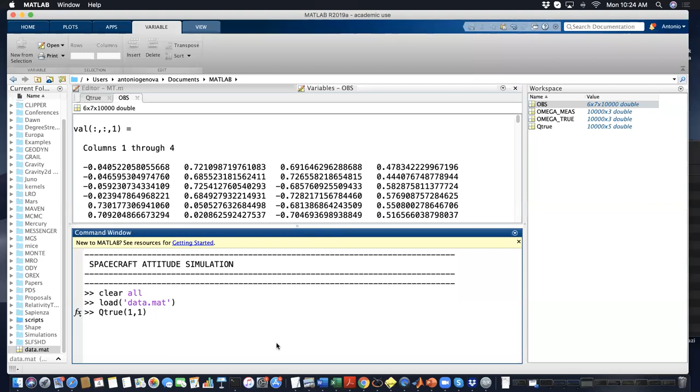So the first quaternion will be indeed the first row and the first 4 columns. So this is the first quaternion indeed, because if you look at column number 5, this is time equal to 0. So the first quaternion at time 0 is the first 4 columns of Q true. You only need this information if you want to compare your estimated quaternion with the known one. Since you have the simulation here, you know the true quaternion, okay?

Well, the OBS matrix, as I said, is simulated by assuming that you have 3 star trackers. And each star tracker at that time gives you 2 measurements of 2 independent stars. So we are already assuming that each star tracker has acquired and identified 2 stars. That means that for each time you have 2 stars per star tracker. So 2 by 3, you have 6 observations.

The epoch of the observations is given by the third dimension of the matrix. So the third dimension here is the time. For time equal to 0, you have to take the first submatrix. The matrix is composed, as I said, of 6 by 7. So what you can see here is that for OBS, at the first epoch, you have a matrix 6 by 7. The 6 rows correspond to 6 different observations of the star trackers.

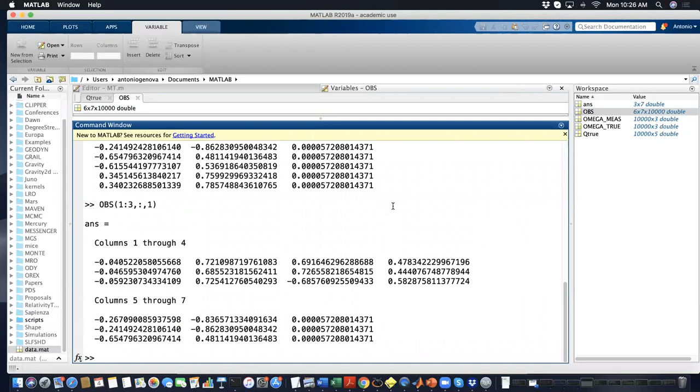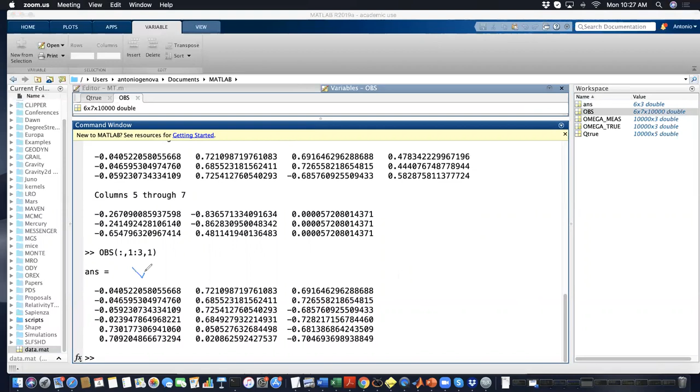The 7 columns are: the first 3 are the vector W, so your measurement. From the first to the third column, you have the vector W. So what I mean here is that you have WX, WY, and WZ. And that will be the first observation, the second one, the third, the 4th, 5th, and 6th. Okay?

Same story if you want to have V. V, the knowledge of the star position in the star catalog, is from column 4 to 6. So in this case, you are not going to have W here, but V, okay? The 7th column is the sigma.

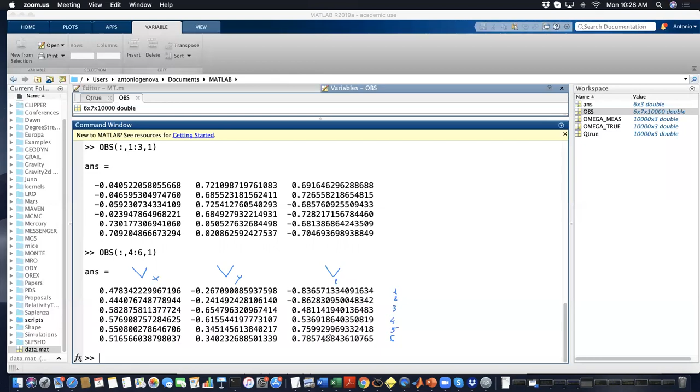To simplify the problem a little bit, I didn't give you a sigma given by the error in the acquisition of your measurement, so a sigma W and a sigma V, but the last column of this matrix represents the sigma. Since I assumed that you have star trackers with the same resolution for a simplified test, I gave you the same sigma.

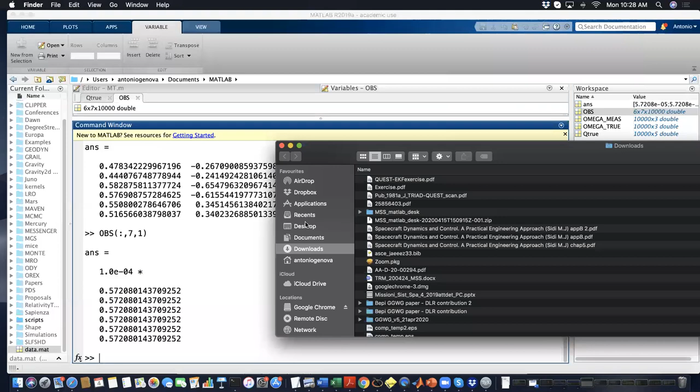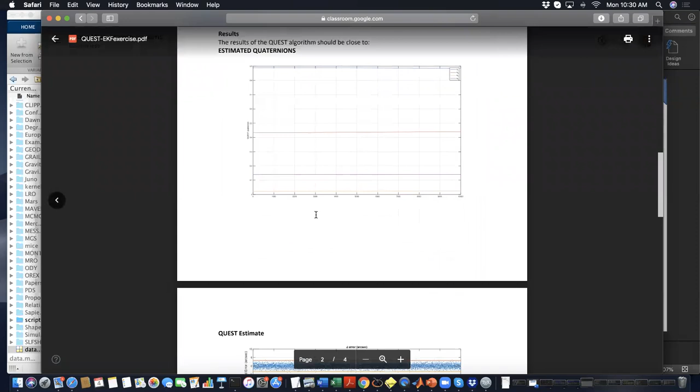But since it is an exercise in preparation for the homework, I'm not giving you exactly the exercise that you're going to have to do as homework. This is only to give you all the information that you need to have a solution of the QUEST algorithm, and you can compare it with the one that I showed you in the other classroom file. The structure of the matrix should be pretty clear because I wrote it here in detail. The solution that you should have from the QUEST algorithm should be very close to this one.

A few of you started the exercise just after I uploaded the file on the website, and noticed that in the initial quaternion that I provided, this Q true, the first 3 columns are the vector part of the quaternion, and originally I gave you a negative vector part instead of a positive vector part. So after a couple of hours on Friday, I updated this file with these values.

The reason the file has been changed is that the quaternions of the real mission have an additional transformation from a real quaternion to its conjugate. So the files that we have for the real mission, instead of giving you the quaternion directly, give you the conjugate. It means that only the vector part has a sign change.

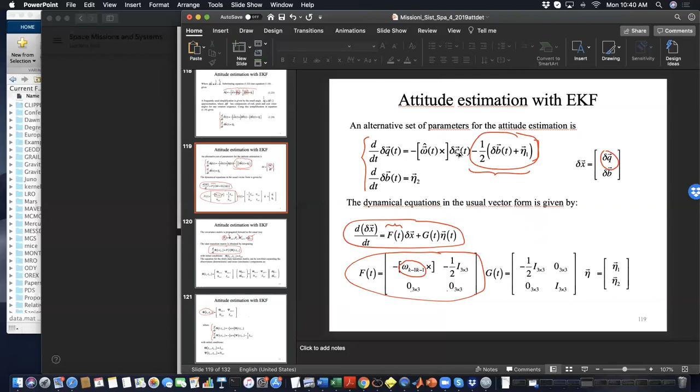The difference between this propagation of the transition matrix with respect to orbit determination is that you are propagating the error by using the property of the quaternion that the delta error of the quaternion is not a difference between the known and the estimated, but here you have the multiplication. So to have an estimation of the delta quaternion, you have to have a cross product of the angular velocity and the delta q. That will be clear later, but I saw that a few of you already started to implement that.

The other main criticality of this problem is the matrices Rk and Qk. That's the reason why the exercise is pretty helpful, because many of you didn't understand completely what I mean by the tuning of the filter. So the exercise will help you understand that. The matrix Rk, for example, can be directly the covariance matrix that you get from the QUEST algorithm. Since the QUEST algorithm only depends on your star tracker measurements, and this is the measurement error covariance, you can assume that your Rk is close to the covariance matrix resulting from the QUEST algorithm.

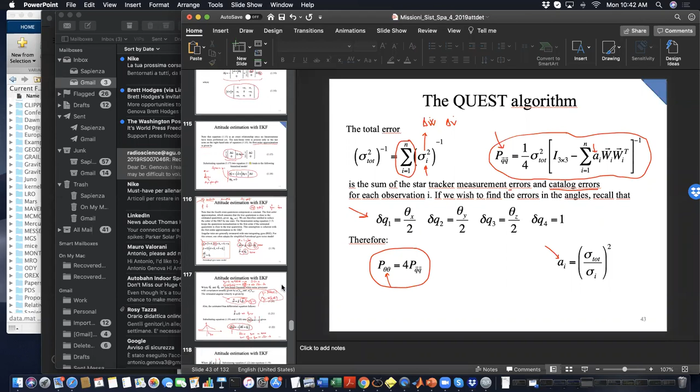So I jump back to the QUEST algorithm solution. What I mean is that the QUEST algorithm gives you this covariance matrix. So you can use this information as your Rk. I will show you that in the script when we show the solution of the exercise. The other main problem is Q, because many of you correctly pointed out: what value of Q is reasonable? This is a fair question.

That could be easily answered for this problem by using the formal uncertainties sigma v and sigma u. If you use these two coefficients, you can, for example, start with a diagonal matrix and try different combinations of sigma u and sigma v. I will show you the combination that I use when I show you the exercise. But you can already start to use sigma v and sigma u to see how that affects your Q matrix. You can also use scale factors to see how the behavior of the Kalman filter changes with your values.

You don't need to propagate the process noise here. Since you have very short time steps, you don't need to do that. It is a simplified exercise, and it is not requested because it is outside the scope of the course. This is only the presentation of the exercise, but I will go into detail next Monday or Tuesday, before giving you the homework. So all your concerns and doubts will be fully addressed. If you still have any problems regarding the text, ask me during the break, or now.

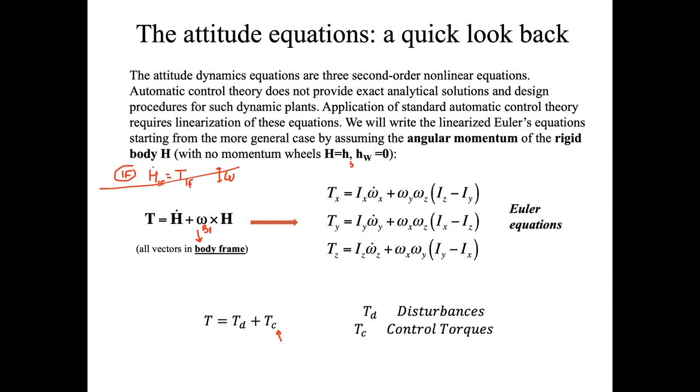Last week we concluded our part on control theory by only looking at the passive stability of the spacecraft. So let me recap briefly what we have seen. We started from the Euler equations in general. We assumed the small angle approximation, so that the body frame is very close to the orbital frame, and we are also assuming a circular orbit.

With these two assumptions, we are able to simplify these equations to three equations in roll, yaw, and pitch. And we have seen that the pitch dynamical equation for attitude control is decoupled from roll and yaw. One of your questions, if I remember correctly, was whether we have considered the gravity gradient. Well, yes, because as I said, we are considering that our body frame has to move concurrently with the orbital frame.

So if we want our body frame to coincide with the orbital reference frame, what we are going to introduce in our equations is the gravity gradient, because the gravity gradient means that you have one axis that is always pointing towards Earth. So the spacecraft, in particular the Z axis, is going to be nadir pointed. So ZB should be close to Z0, the axis of the orbit.

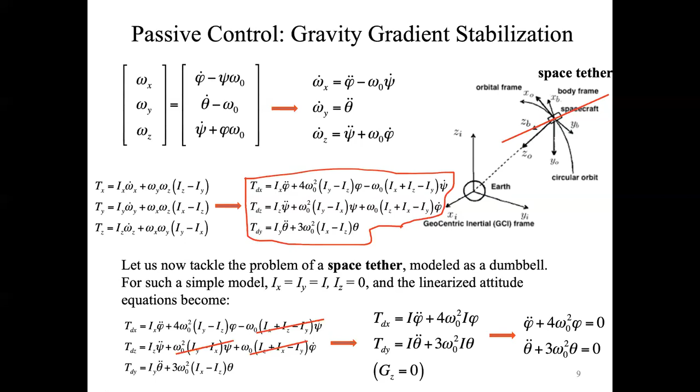So the gravity gradient is accounted for here, and the gravity gradient terms are given by terms that depend on the mean motion of the spacecraft, as you can imagine, because our reference frame is rotating according to the motion of the spacecraft.

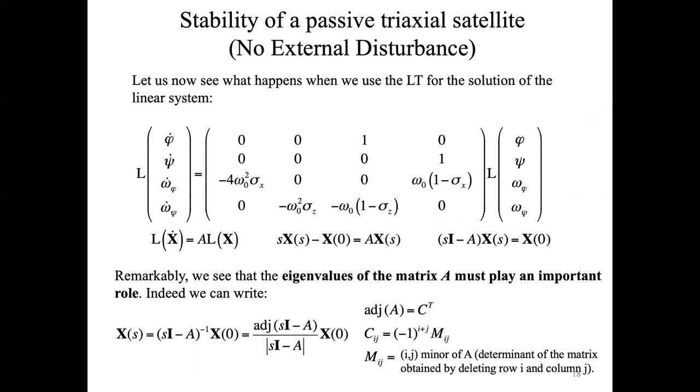So we have investigated the pitch dynamical equation. We have seen that it is stable. It provides stability if we choose the moment of inertia along x greater than the moment of inertia along the yaw axis, so Ix greater than Iz. The main problem is also to investigate the dynamical stability of the roll and yaw axes, because as we have seen, those axes are coupled. So we need to consider this characteristic equation that comes from the matrix we saw last Thursday. Also in this case, as for the pitch angle, our stability depends only on the gravity gradient.

Because one of your questions during the weekend was: we are considering that there is no disturbance, is that the reason why we're able to have stability? Well, the stability of the system is studied independently from the disturbance. We are studying the stability of the associated homogeneous equation. So we have to investigate the stability of the system by assuming that the disturbance is equal to 0.

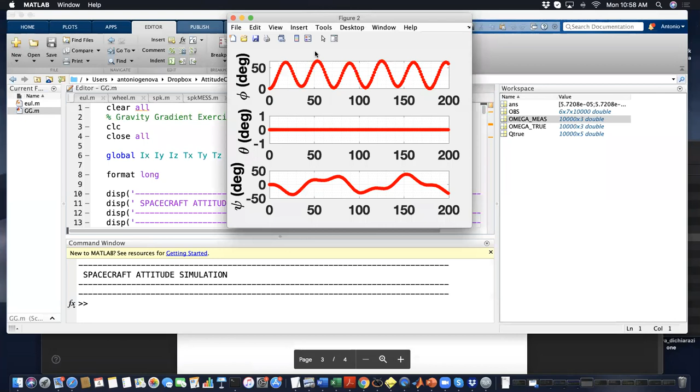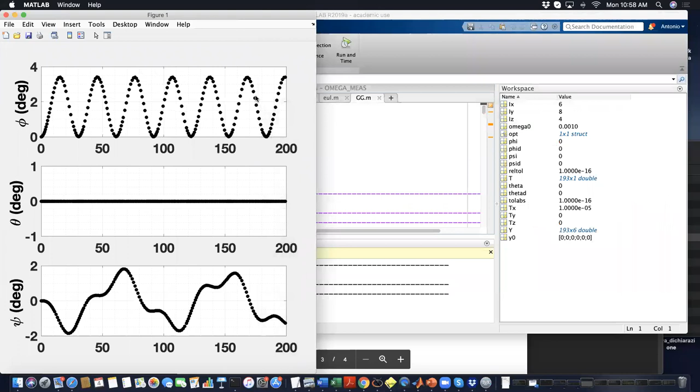So what we can see here is that by augmenting this moment of inertia, we have seen from the MATLAB script that I showed you last time that you will have 2 different conditions. So by starting from a yaw angle equal to 5, what you can see here. So this is not what we... This is the first case. Let me see.

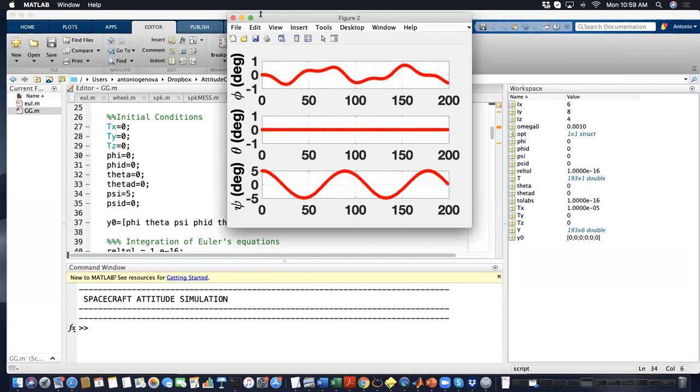So if we start with the angle psi, so the yaw angle equal to 5, what you can see here is that the red curve represents your oscillation of the angle in the roll, pitch, and yaw axis, and you can see that the oscillations along the roll axis are larger if you have a lower moment of inertia. So by including a boom, you are able to increase the moment of inertia and basically to reduce the oscillation along the roll axis.

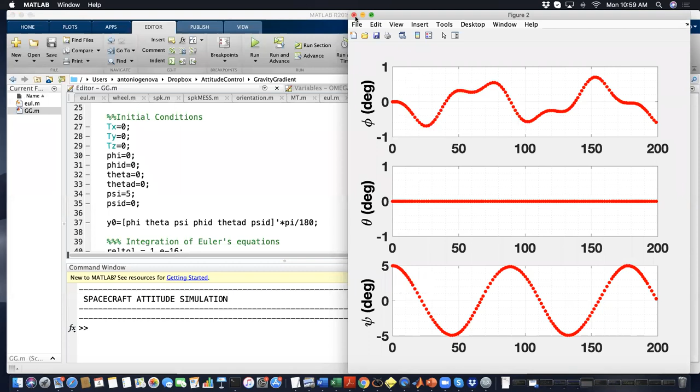What we want to do in the next hour is to use the first actuators of the course, with which we're going to indeed remove or damp the oscillation that we have seen so far. So we know that the gravity gradient cannot provide asymptotic stability, but can provide stability in roll, pitch and yaw axis if the conditions on the moment of inertia are satisfied. We need to include actuators that, for example, enable the damping of those oscillations.

So the first case that we are going to see is indeed the libration control by using wheel dampers. And the second actuators that we are going to see are the magnetorquers. So the wheel dampers, as we are going to see, only have the possibility to damp the oscillation of the spacecraft. So they can work properly by the combination of the gravity gradient, which has to provide stability to the system through a certain configuration of the moment of inertia, but you also include an extra term given by the wheels in order to damp those effects.

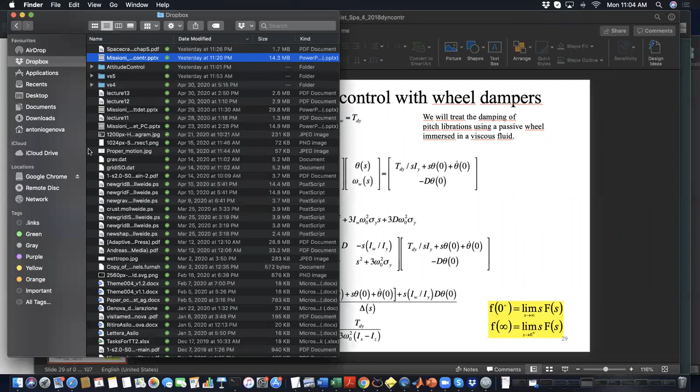So the process noise here is basically adding some information to the covariance matrix that you are propagating in your Kalman filter. So if you have larger values, it means that you are assuming that your data from the gyroscope are affected by significant errors.

Because the problem here is that when we are propagating the covariance matrix, we are not including the matrix G. So the only information given by the mismodeling of the spin rate measurements from the gyroscopes is given by the matrix Q. So if you increase the matrix Q, it means that you are deweighting your gyroscopes.

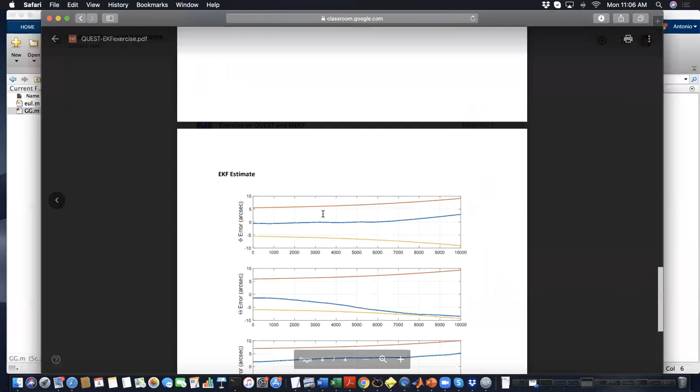So what you could expect, let me show you from this one, is this curve here, the sigma in the angle. You can see already a result that I showed you in this exercise: the first thing you can notice is that the uncertainty with the extended Kalman filter is larger with respect to the QUEST algorithm. That should not be a very strong surprise, because what I gave you is a very poor gyroscope.

So it means that when you try to determine the attitude of the spacecraft, you are introducing an error that is significantly larger than the star trackers. And the star trackers are not able to correct that because it is too large, and so your estimation tends to increase over time. In principle, you use gyroscopes to decrease this curve here.

So usually the precision of the gyroscopes that you find is definitely better than what I gave you. So that's the reason why here the tuning could not work properly, because the information provided by the gyroscope is so poor that you are not able to increase or reduce Q in order to overweight your gyroscope measurements.

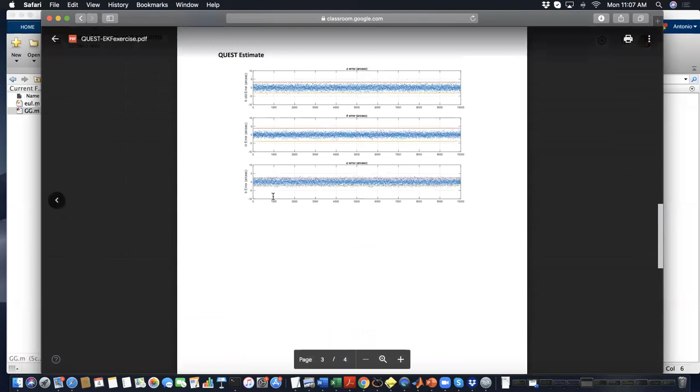So the values of sigma V and sigma U are indeed too poor, so low quality of the gyroscopes, that you're not able to scale Q in different ways. But assuming that here you have other values, for example 10 to the minus 11 and 10 to the minus 10,

in that case the weight of Q would change significantly the curve here, the sigma that you have in the extended Kalman filter, because the sigma will be lower in the extended Kalman compared to the Quest algorithm. And so you have to be careful that your error is not going to be outside the sigmas. So in that case, you scale your Q

in order to be sure that you are not overweighting your gyroscope measurements. In the case that you have here, I can understand that you cannot really see the difference, because sigma V and sigma U are so large compared to the precision of the star trackers that I gave you. But in principle, during the exercise next week, we can try to change the simulated measurements of the gyroscope and see better how the tuning works, because that would be pretty helpful.

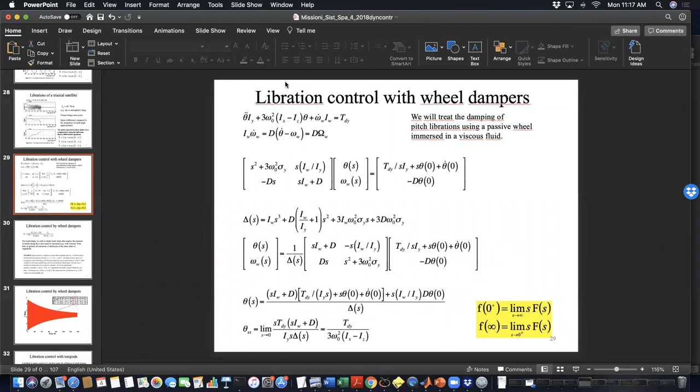Okay, so the main purpose now is to introduce control actuators. We have seen that gravity gradient only provides stability for roll, pitch, and yaw axis for specific configurations of the moment of inertia. But we have structural problems to do that. For example, we have seen that the moment of inertia Iy has to be less than the sum of Ix plus Iz.

And we know also that for Iy to be in the first region, region A... so in the case we have seen before, in which Iy is equal to 8, Ix is equal to 6, and Iz is equal to 4, we used a Z boom, so a boom along the yaw axis in order to...

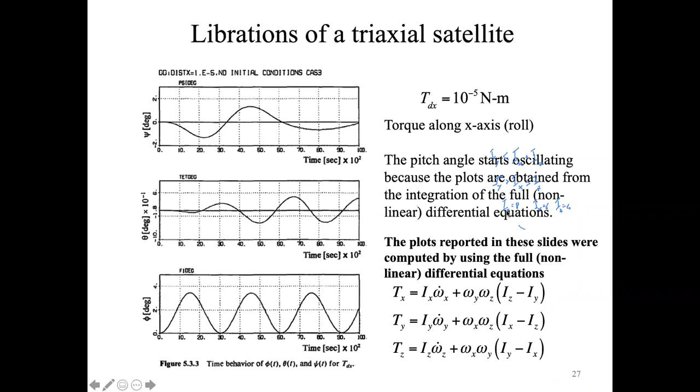Ok. So these Ix, Iy, Iz, with Iy equal to 8, are the cases that we have seen before. I don't see my mouse anymore. Let me see. Okay. So it's basically this example here. We have used a boom along the z-axis in order to augment Ix and Iy.

The problem that we have seen here is that we are not able to increase them with values that are completely unconstrained, because we need these two relationships to be satisfied. So for example, if we want to augment Iy to 82, we have to be careful that Ix plus Iz has to be greater than that. We know that Iy has to be larger than these two.

But in order to have this condition satisfied, we need at least Ix equal to 82 minus Iz, that is equal to 4. So basically, Ix has to be between 82 and 78. That's the reason why when we did the z-boom, Ix was equal to 80. So that shows you that we are not able to provide an unconstrained solution of the problem with the moment of inertia only. So we need to include additional actuators in order to control the system.

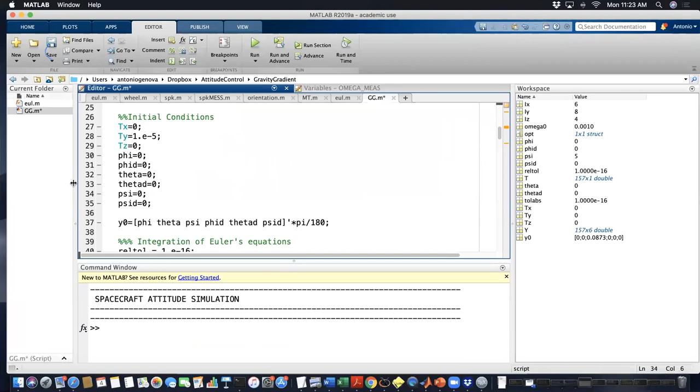So by looking at the MATLAB program, let's assume, for example, a disturbance along the pitch axis of 10 to the minus 5 Newton meter, and no initial pitch, yaw, and roll angles. So if we simulate that for, for example, a few hours, let's do it, okay.

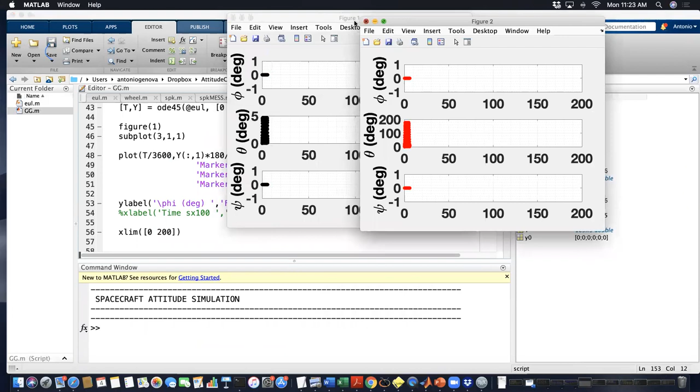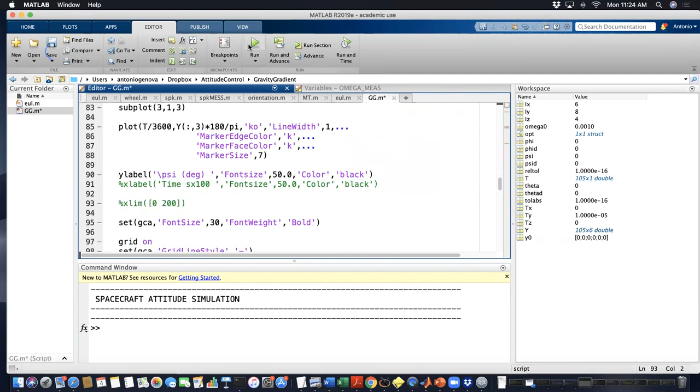So now let's look only at the black curve, in which we have the boom along the z-axis. Okay, so what you can see here is that the yaw and roll axes are not moving because the disturbance is only along the pitch axis.

And we see that we don't have an oscillation with a mean value equal to 0, but the spacecraft is going to oscillate because of the disturbance along the pitch axis with a certain amplitude. And also what we can see is that we have only stability, because this perturbation is not damped. So we are only able to have that.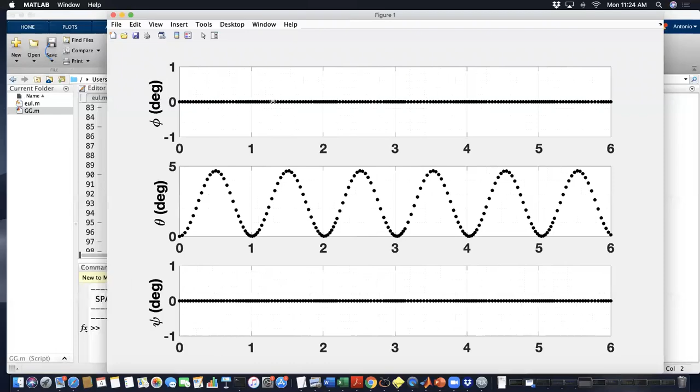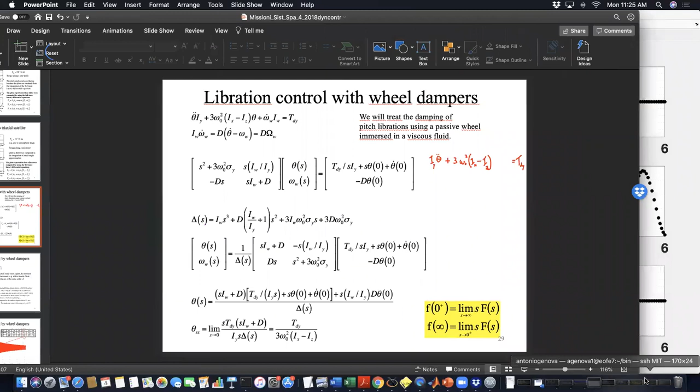Let me try to have the slides. So what we have here, let me know if it is too small, but what I would like to show you here is the pitch dynamics. So now we introduce a constant torque along the y-axis that is equal to 10 to the minus 5 Newton meter. So the spacecraft tends to oscillate with this value.

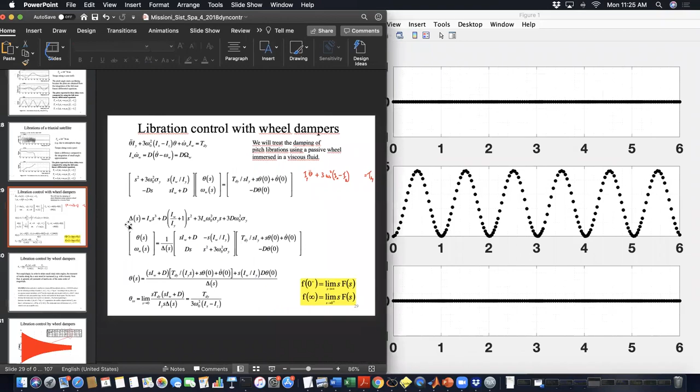And I forgot to write an important term here. So this is theta. Why is it important to have theta here? Because we can indeed determine the mean value at which this dynamical equation is going to settle. Because as you can see here, the theta direction is oscillating around, for example, an angle equal to 2.5 degrees.

This 2.5 degrees is not a random angle, but is given by the value of the torque, the mean motion of the spacecraft, and the difference of the moment of inertia along x and z. So basically, you can compute the steady state value, that will be T dy divided by 3 times omega 0 squared times Ix minus Iz.

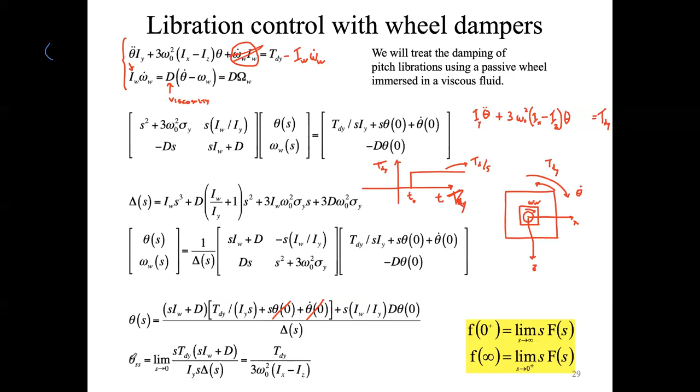So assuming that the spacecraft, as I said, is starting from initial position equal to 0 and initial velocity equal to 0, what you get is that theta steady state is the limit of this function when s tends to 0. Be careful that the function of time at infinite time corresponds to the limit of the function in the Laplace domain when s tends to 0. That's the reason why s is tending to 0, because now we are trying to have the value of theta at infinite time. And you have to multiply this function by s, so there is also an extra s here. This is always a problem.

These are related to the Laplace transform definition. So if you multiply that by s, you can easily see that these two s will be simplified, and this term tends to 0. So you will have that theta ss will be converging to the value that I showed you before.

So the gravity gradient and the wheel dampers are not going to give you the desired angle that you want, but it is going to converge to a value that directly depends on the disturbance and the moment of inertia and the mean motion of the spacecraft. So although you're including an actuator, this actuator is only going to damp your oscillation, but it's not going to provide the orientation that you want.

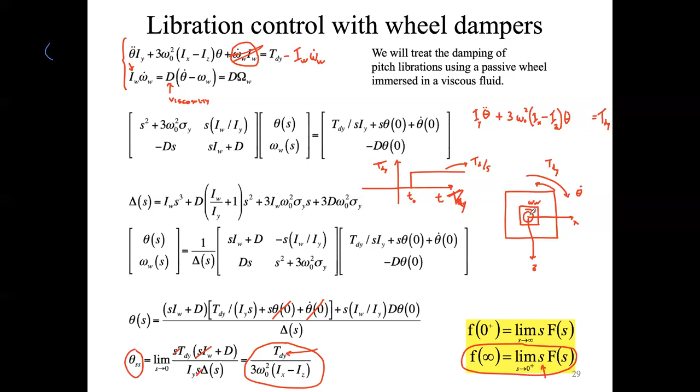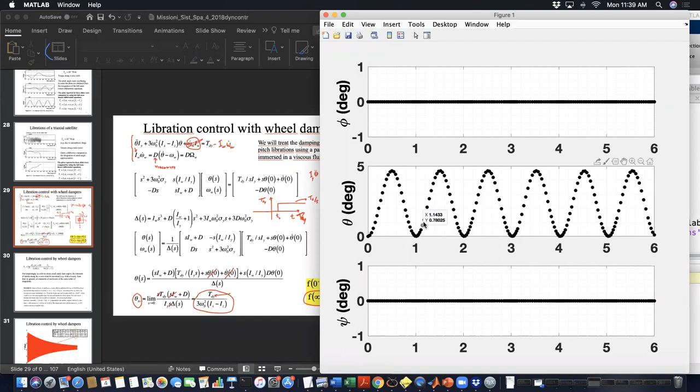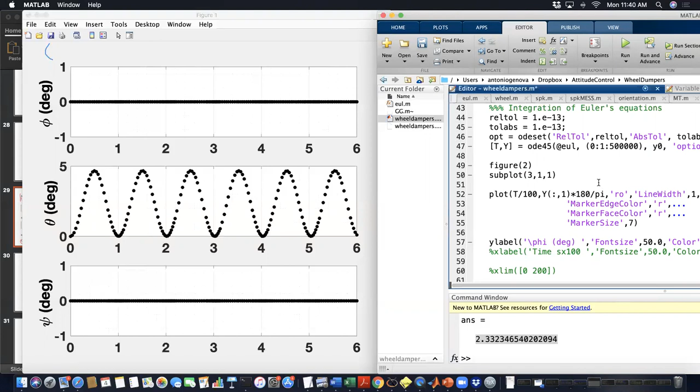Okay, so that's the case in which the gravity gradient is only counter-reacting to a disturbance of 10 to the minus 5. So now let's try to do the same. Let's keep this figure here by including a wheel damper, and let me use the same moment of inertia. So figure 2. So now I introduce a wheel damper with the moment of inertia equal to 0.4 kilogram square meter and a coefficient d equal to 10 to the minus 3.

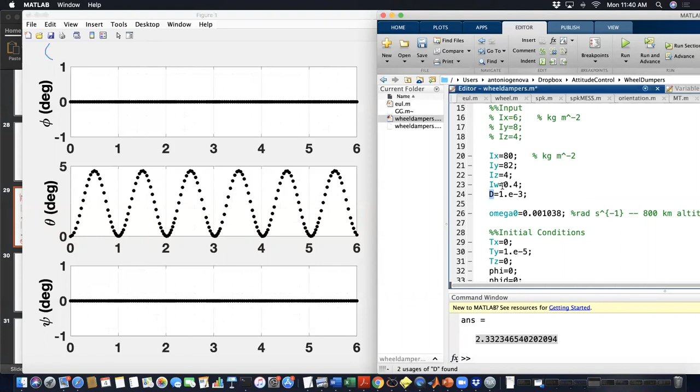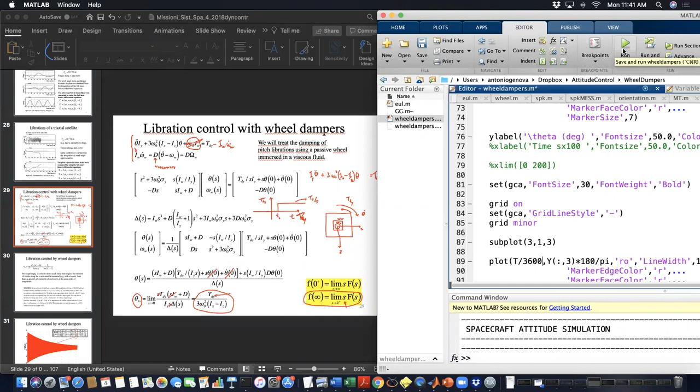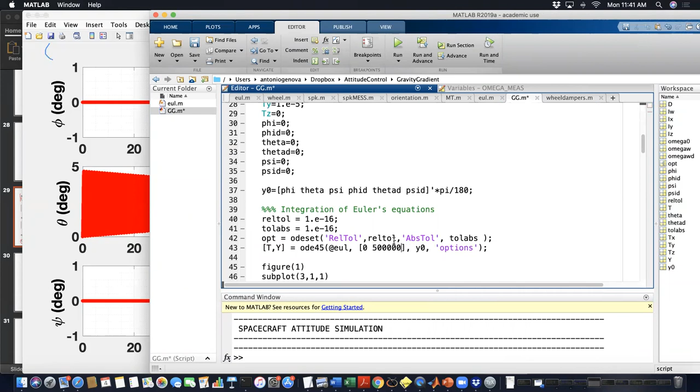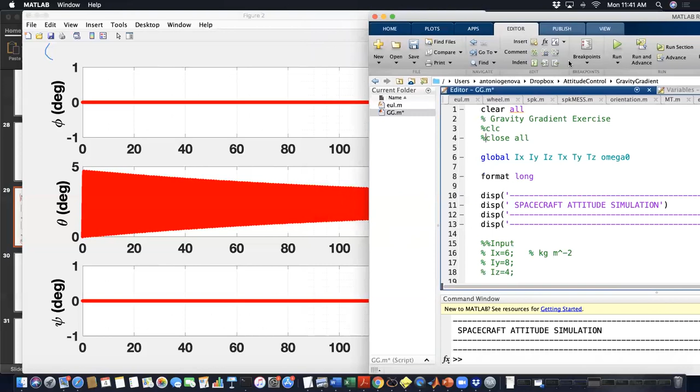So let's see what happened here. Okay, it closes my figure. So let me redo, in order to compare exactly what we had before. Okay, so what you can see here, the time here is in hours. So the black one will be without the damping. Okay, here it is. But like this it will not be visible, so let me try to zoom in.

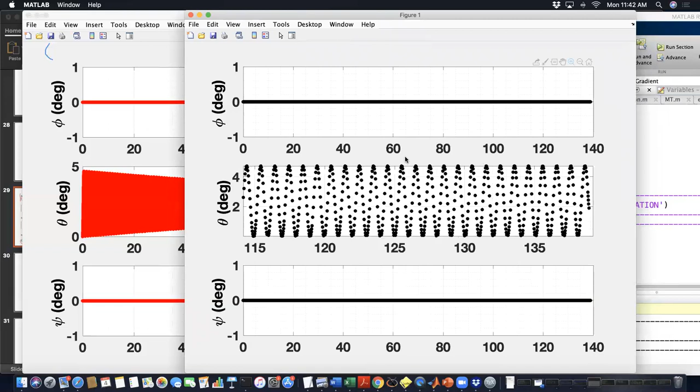What you can see here is that the black one is the gravity gradient acting on the spacecraft that, as we have seen before, only provides oscillation between 0 and almost 5 degrees because the mean value is 2.3 degrees. You can see that if we have this gravity gradient for 150 hours, so basically for 5 days, the spacecraft is going to oscillate with a certain spin rate.

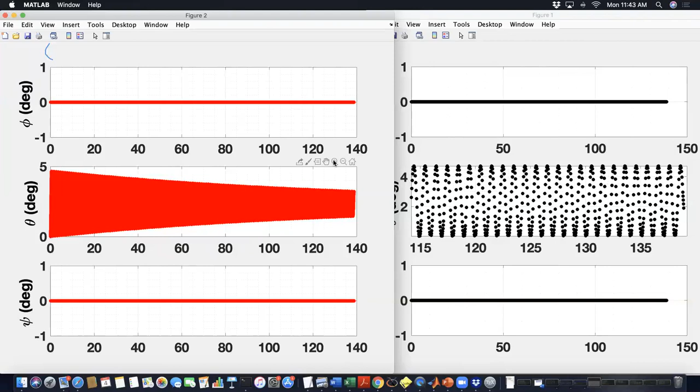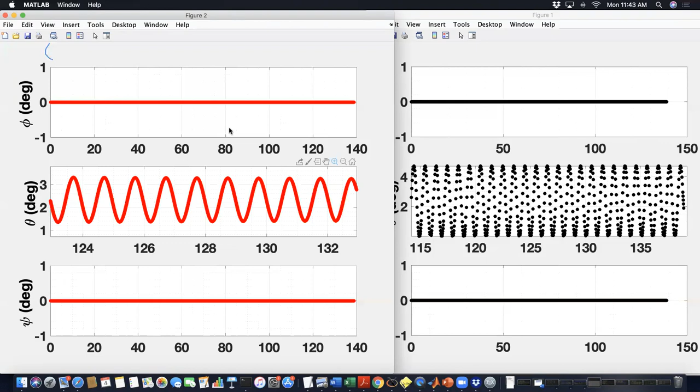What you can see here is that if we introduce a damping, the spacecraft is going to have similar oscillation with the same rate. Let's see if I can zoom here. But the amplitude is definitely lower because the damper is reducing the oscillation, but the mean value of our orientation is still always close to 2.33. So the wheel dampers are not able to provide any control on your final desired angle because this one is only given by the disturbance, the mean motion of the spacecraft, and the moment of inertia.

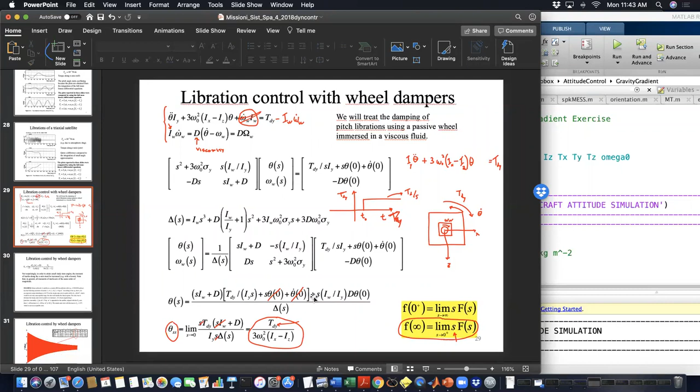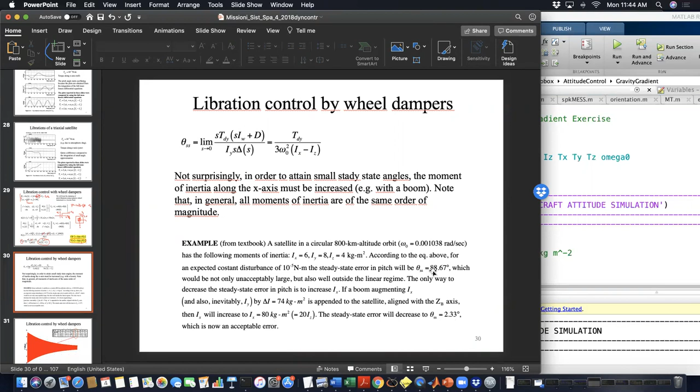So the example that I showed you before is by using the moment of inertia Ix equal to 80 and Iy equal to 82. That is the example that you have here. If you want to try with a smaller moment of inertia, you will have exactly the same behavior, but the final steady state angle, instead of 2 degrees, will be equal to 89 degrees. So it is a very large angle.

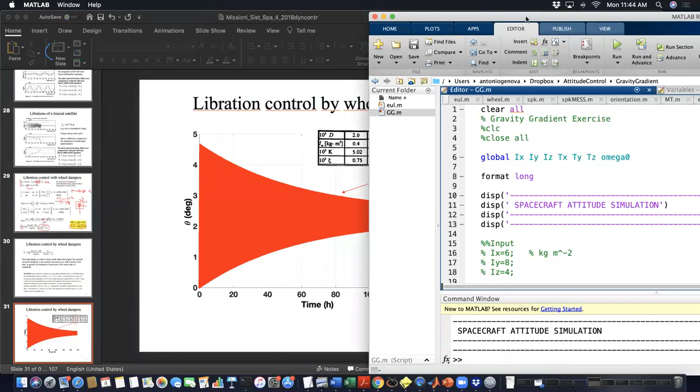The values that I have used for this plot assume some possible realistic characteristics of the wheel. So in principle, you could ask, why don't we use a damping factor that, instead of 10 to the minus 3, is definitely larger, in order to overdamp, for example, 3? That will only depend on the viscosity of the system.

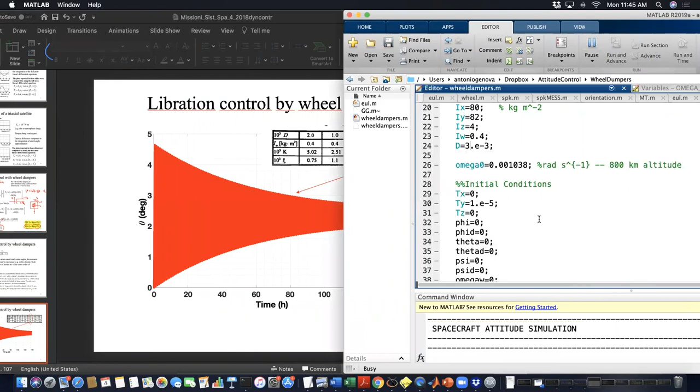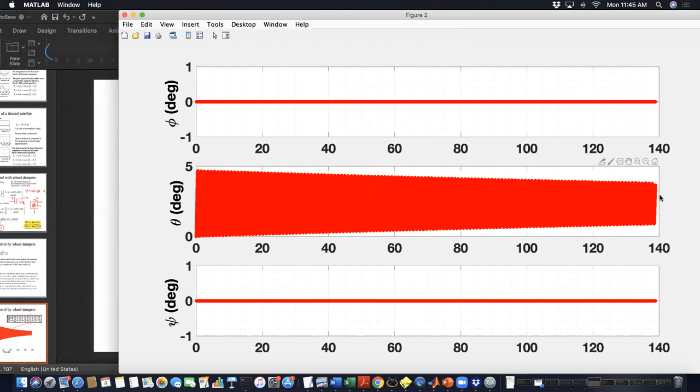So, for example, if you increase D, you are going to have a lower variation of the amplitude. So if you want to go lower, for example 3 times 10 to the minus 4, you need some viscosity of the fluid that is going to change drastically your behavior.

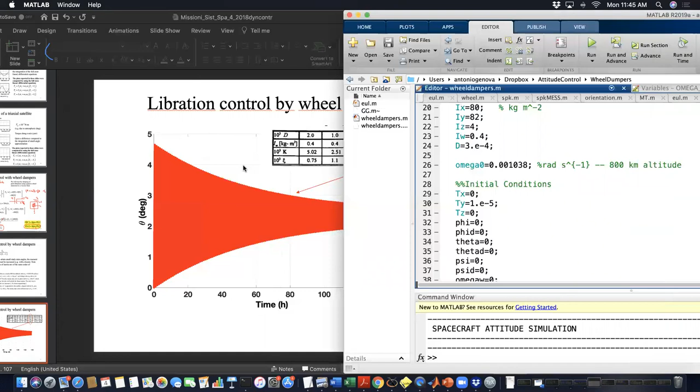So the problem here is that you're not able to choose different sets of D and the moment of inertia of the wheel randomly, because the viscosity of the fluid is given by the property of the fluid, and the moment of inertia of the wheel cannot be so large, because if the moment of inertia of the wheel is large, it means that the wheel itself is also large.

And so you can have indeed problems in terms of mass of the spacecraft. You want to always have, for example, a moment of inertia that is close to 0.4. So you have to be careful that these values cannot be chosen randomly, but for the wheel dampers are directly related to the

wheel characteristics and properties.

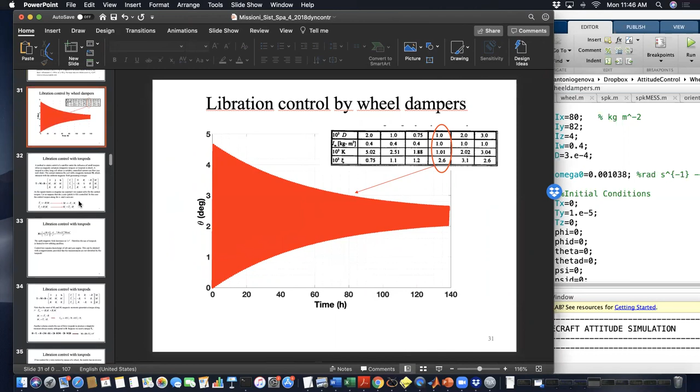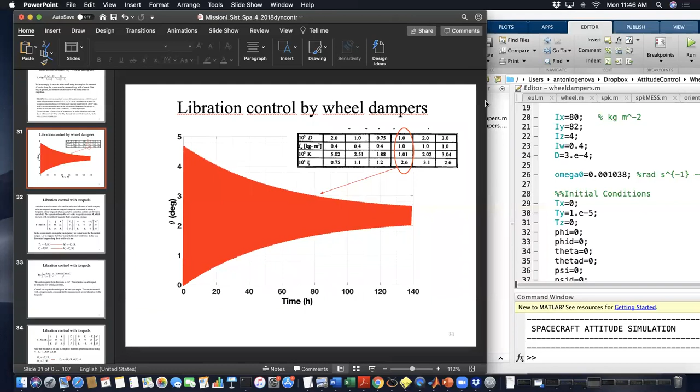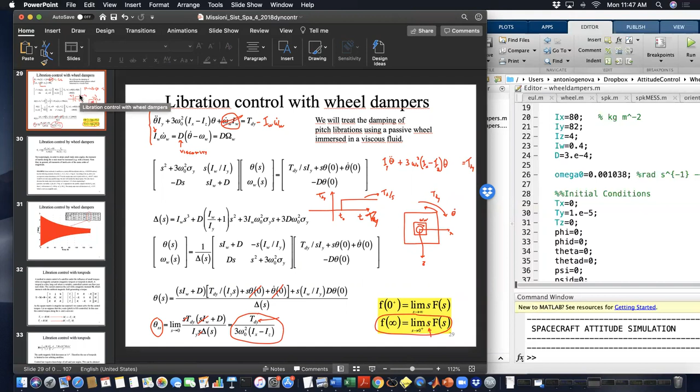So the question is regarding what are the main weaknesses of the wheel damper. The wheel damper can give you a smaller variation of the pitch angle, because basically the damping factor is going to reduce the oscillation after a certain time. But the main problem is indeed the steady state,

so the final angle at infinite time at which the spacecraft is going to converge, is not, for example, equal to 0, that could be our goal, but will be only related to the disturbance, the mean motion and the moment of inertia of the spacecraft itself. So it means that the wheel dampers are not well suited to obtain our desired attitude. We have to design the spacecraft in order to reduce, for example, the steady state angle.

We can increase even further the moment of inertia along X, for example. But as I said, you are not able to change Ix without changing Iy. And so the configuration of the spacecraft, if you increase the moment of inertia, will require larger masses and complication in the properties. So the wheel dampers, from this point of view, are not really the best actuator, and that's the reason why they are not really used right now.

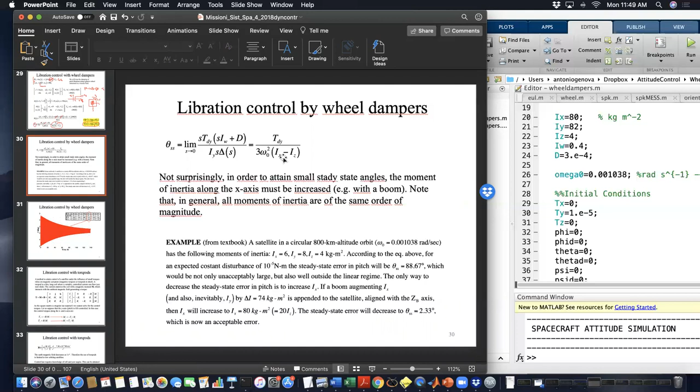Historically, they have played an important role because they enable the stability of the spacecraft by using the gravity gradient and this simple device. But if we want to determine the attitude of the spacecraft, we need additional actuators, and that's why what we're going to see next are the magnetotorquers, the thrusters and the reaction wheels. Reaction wheels are not related to the wheel dampers.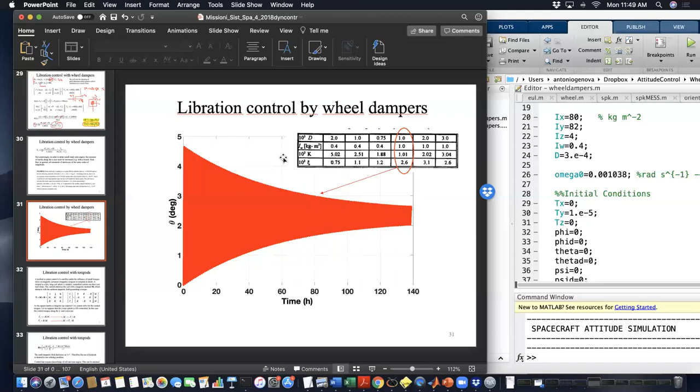The main principle of the reaction wheels is to provide a rotation of the wheel itself that creates an angular momentum that is transferred directly to the spacecraft. The reaction wheels increase the angular velocity of a wheel that is not included in an armature with the fluid, but is an inertial wheel whose only principle is to increase its speed, and the torque used to increase its speed is used to counteract the torque given by a

certain perturbation. That will be significantly different because we are going to modify the velocity of the wheel in order to counteract the disturbance. What you can see here is that we don't have any control on the wheel. The wheel changes its velocity because of the viscosity of the fluid acting due to the angular velocity along the pitch axis. So it is an inverse problem here. With the reaction wheels, it will be clear that we need an active actuator that modifies its velocity in order to counteract a force.

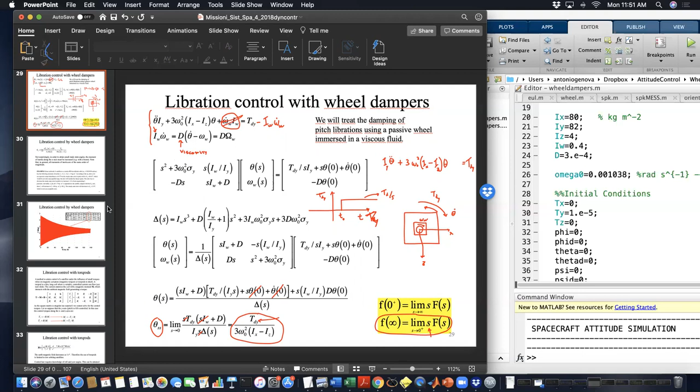So the other actuator that we can use to mitigate or damp the oscillations induced by the gravity gradient are the magnetotorquers, also called torque rods. The principle here is to use another property of the Earth. For the gravity gradient, we use the gravity of the planet to stabilize our spacecraft. Here we use the magnetic field to determine a torque that is going to counteract a specific disturbance.

How can we use the magnetic field of the Earth to counteract the torque? Well, what we can do here is to create three different coils that will have a specific current intensity, that are going to generate another magnetic field.

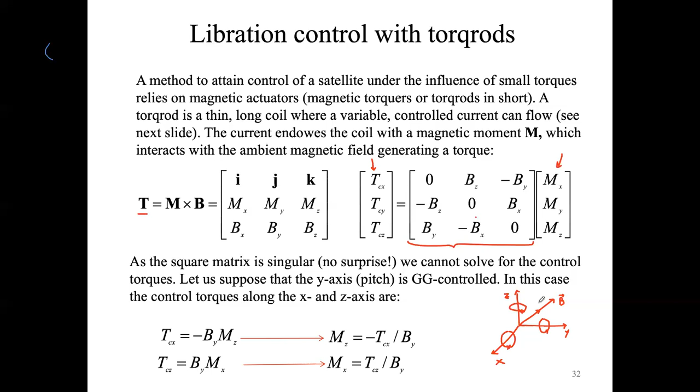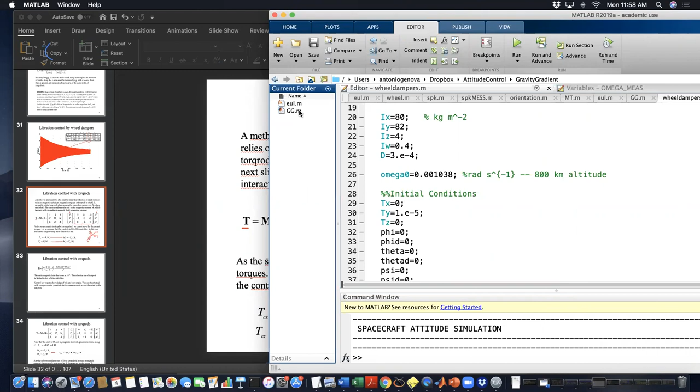Okay, so we need to, and we are going to conclude with that, find a strategy to use the magnetic coils to, for example, try to reduce the yaw axis rotation. You have to be careful. So far, we have seen that the yaw axis is poorly controlled by the gravity gradient. We have seen that when, for example, we included a disturbance torque on the direction of the psi angle, so the yaw axis,

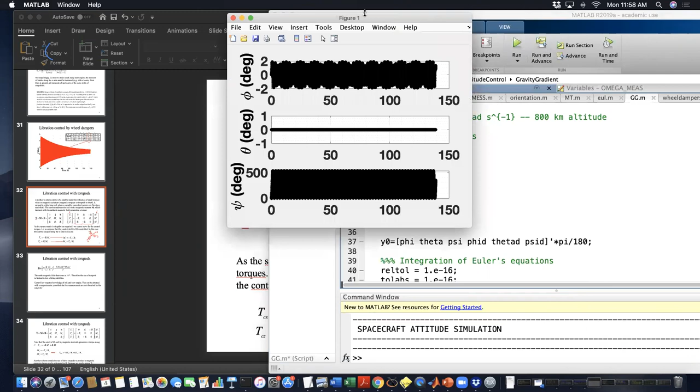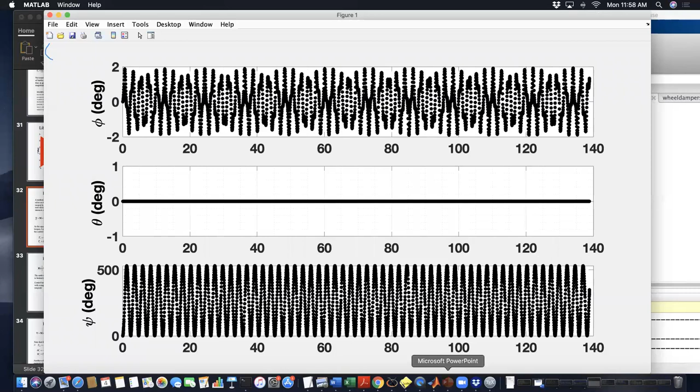the psi angle reaches unreasonable values, because basically the gravity gradient is not able to counteract the disturbance, and that's the reason why you need to include the full, correct dynamical equations of the spacecraft attitude in order to determine the spacecraft attitude control. So the main problem here is that we need to use additional auxiliary actuators in order to control psi, although you have the gravity gradient.

We're going to see tomorrow that we can try to determine a control torque along the z-axis using the torqrods that can mitigate errors induced by a disturbance along the z-axis. And also that we are not able to provide a control scheme with the torqrods that is completely decoupled between the yaw and the pitch axis.

By looking briefly at this product, you can see that in order to have the torque along the yaw axis, you need mz times by. But if you have mz, so a current along this coil here, you also have an undesired torque on the pitch axis given by bx times mz. So you have to be careful that your control acting on the yaw axis is also going to change your pitch dynamics.

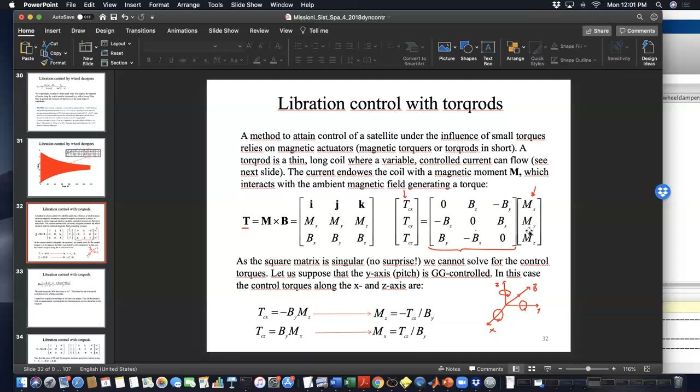So I'm stopping here, and tomorrow we are going to restart from the torqrods and provide some examples using a MATLAB script that shows the benefits and the weaknesses of the magnetic torqrods. Afterwards you're going to see the reason why thrusters and reaction wheels represent the main devices that enable good active control of the spacecraft.